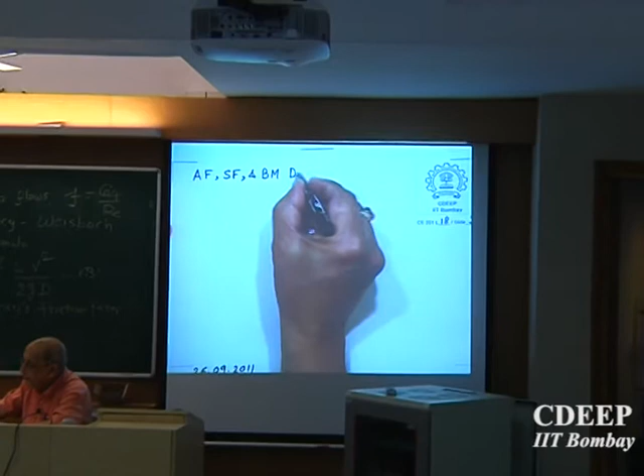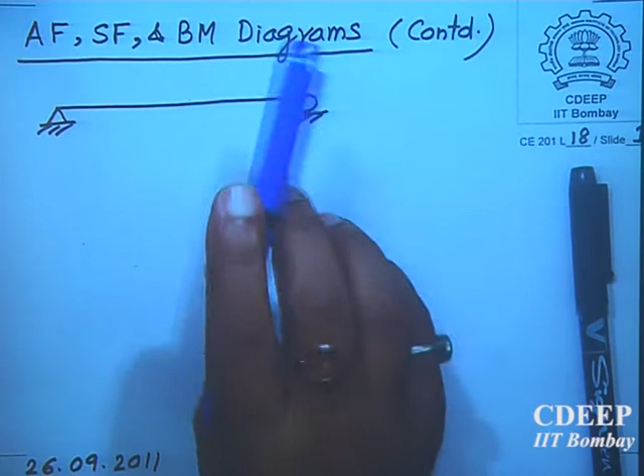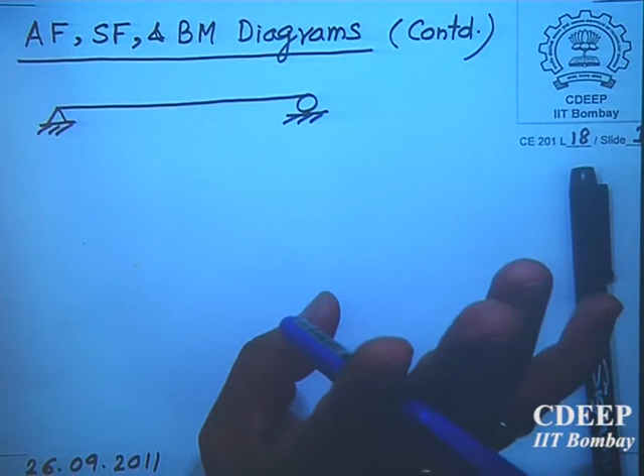We will continue with this. This is a simply supported beam, meaning the support is such that there will be only three reactions. Why is it called simply supported? Because the support is such that there will be only three reactions if the loads are applied to it in any manner. There will be three reactions, and these three reactions can be solved by equations of statics, equations of equilibrium. So such problems are called statically determinate. We are talking of only bending moment diagrams, shear force diagrams, and axial force diagrams for determinate structures, not indeterminate.

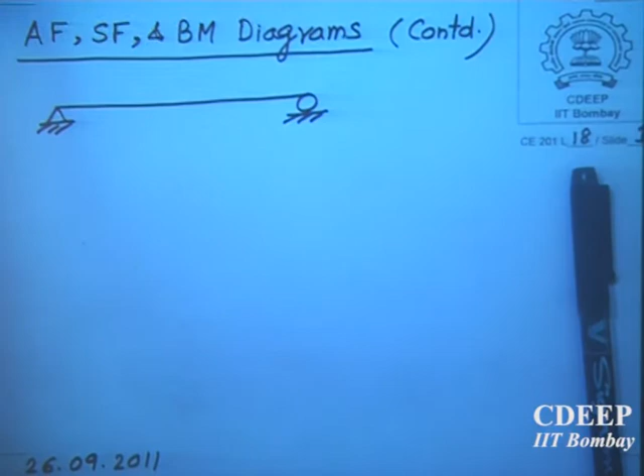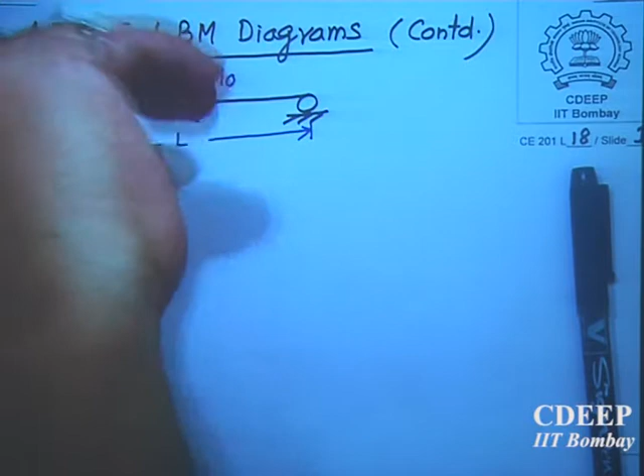So let us say that we have in the center at L by 2, this is L, length is L, at the center I apply a bending moment M naught. Now how do you apply this bending moment M naught? A moment whose vector is perpendicular to the plane of the paper. So there are various ways in which this bending moment can be applied.

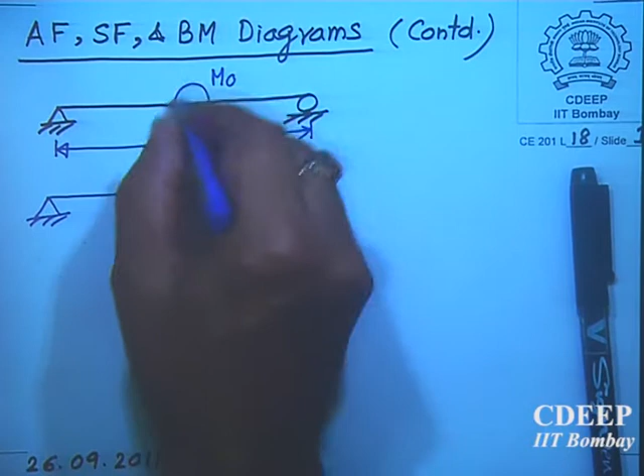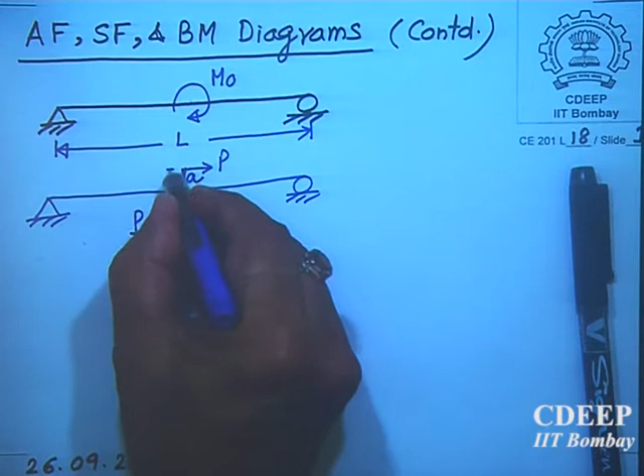Diagrammatically this is all right, that you have applied a bending moment. Now a moment also is called a free moment. It can be applied anywhere, although I am saying that it is applied in the center. So here I can apply this, I can have a small length, this can be A, this can be again A, this means this length from here to here. So I apply a couple, equal and opposite forces, and the distance between them is 2A, such that P into 2A is equal to M naught.

So this is a possibility. Now can you apply this? How do you apply a force like this? A horizontal force. Okay, P into 2A, I will keep that. I think you should learn how you will apply this force. So there are various ways.

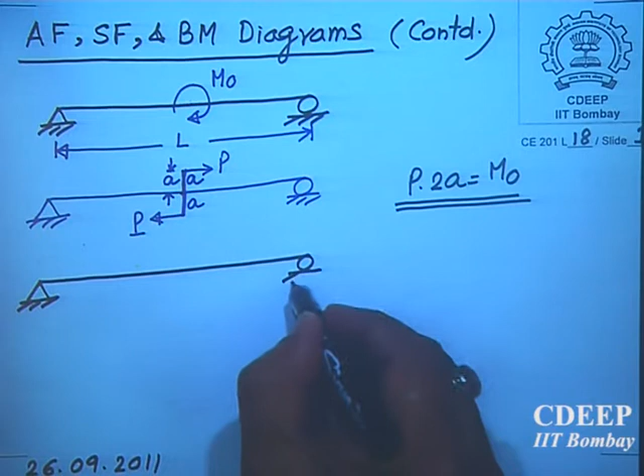I think this is where I am poor in experimentation, but then you should be able to, innovation comes only through experimentation. So you should be also a good experimentalist. In addition to being a good theoretician, you should also be a good experimentalist.

You should know how to apply this load. It is not that you have to apply it directly. So here you can have a stud which is welded over here. You can weld a small piece of a small rod to this beam. Similarly, you can weld here also. Welding, you can do the welding. So this length is A. You can put a...

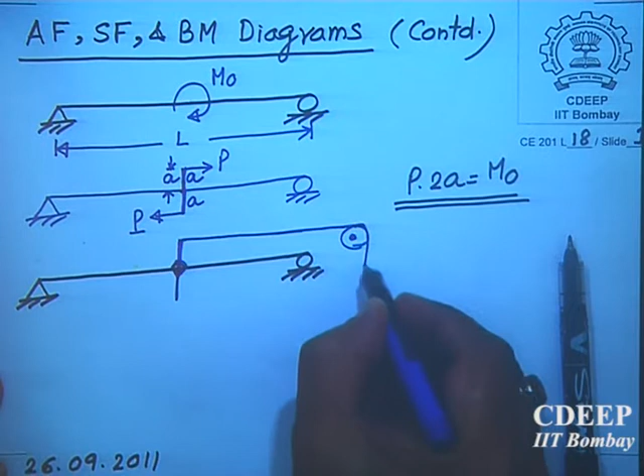String, and you can have a pulley here, a frictionless pulley, and apply P to a load here. So that will pull. This string will be under tension. So this P will be everywhere if there is no friction. And similarly here also you can do the same thing. You can put a pulley, force. Pulley means there has to be some support, and then weight. So this will also be under tension.

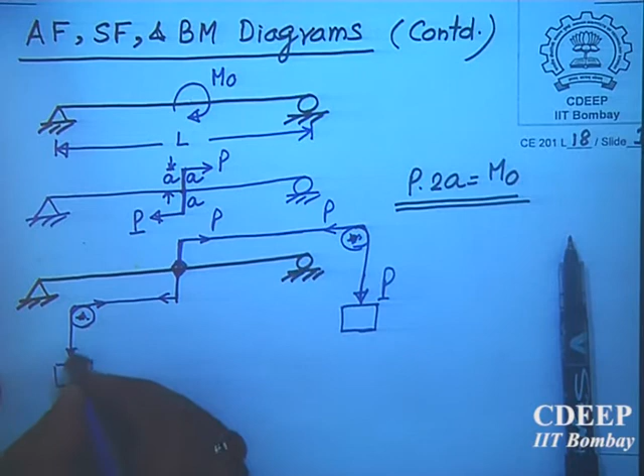So these are the ways in which this moment can be applied. This is not torque, this is bending moment. Sorry, it's not torque—torque has to be applied along the axis of the member. There is a difference between bending moment and torque, so teachers also make mistakes. It is not torque, it is bending moment. Torque you have seen applied to a shaft under twist, a circular shaft under torque—that is applied along the axis, the vector is along the axis. Here it is not along the axis, here it is perpendicular to the axis. This bending moment, okay.

So this is a possibility. So the moment is applied. Now I want you to draw axial force, bending moment, shear force diagram for this. I have not drawn it yet. So first of all, you have to draw the free body diagram. So this is a rod. Draw it very neatly.

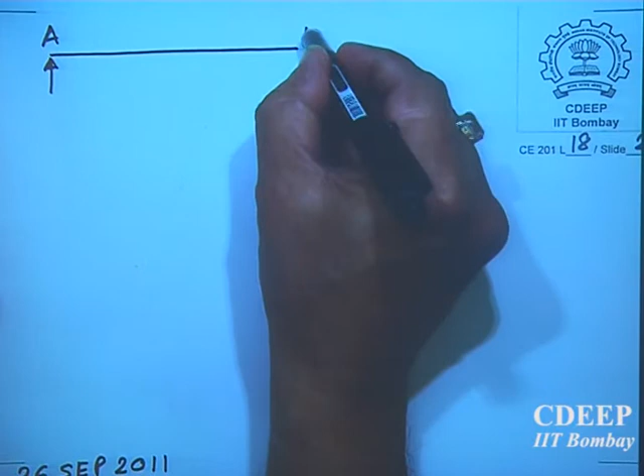This point is A, this point is B. This is a roller, so there has to be only a reaction upwards. This is a hinge, so there will be two reactions, let us say VA and HA, and here it is VB, and here we are applying moment M naught.

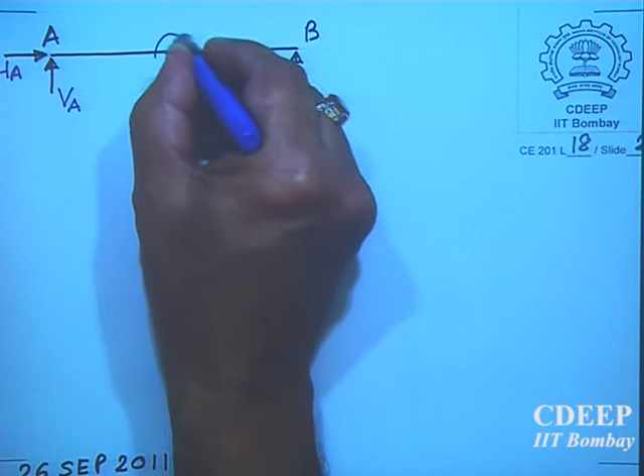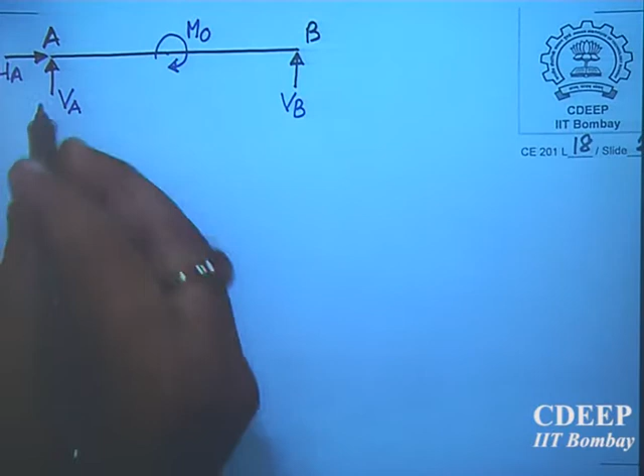Because this is a free body diagram, what about the free body diagram of the support, which is not normally given? Support is here, you have removed the support, so support will be, and similarly here is the support. You have removed, you have cut through the support, so this will be subjected to VB.

Here this will be subjected to VA and HA, equal and opposite. Newton's third law comes in here, equal and opposite. So this is the free body diagram of the support, the hinge and the roller, and this total is the free body diagram of the beam.

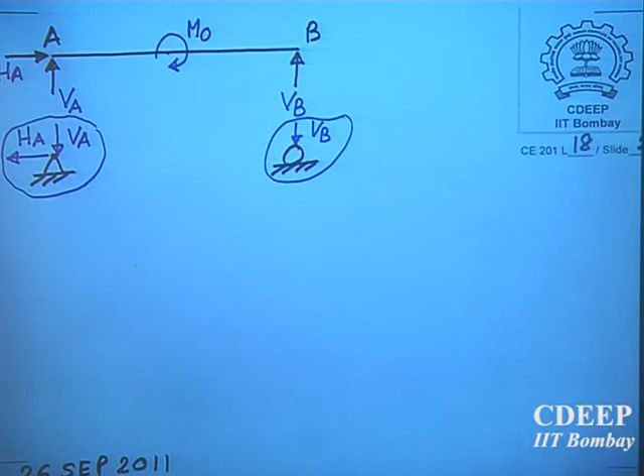Is it okay? Have you understood? So although we never draw this, I don't know whether this is given in the book. Support free body diagram, is it given in the book? Check up.

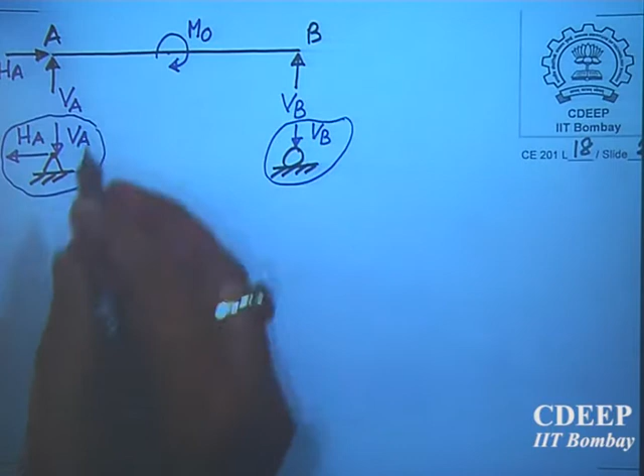So first thing is VA plus HA, horizontal force must be 0, so there is only HA. Then VA plus VB is 0, there is no vertical force, so this is equal to 0. Take moment about any point, I am taking moment about point A. So about this, M naught is a free vector, so M naught clockwise minus VB into L equal to 0.

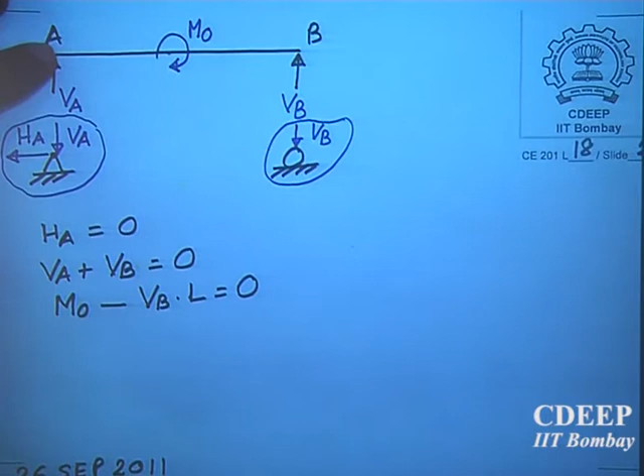These are the three equations of equilibrium. So this you have to write clearly, then only you can find out. Now HA, first one is giving, so from here you get M naught by L. VB equal to M naught by L. So directly you got the value of VB here. Is it okay? M naught by L.

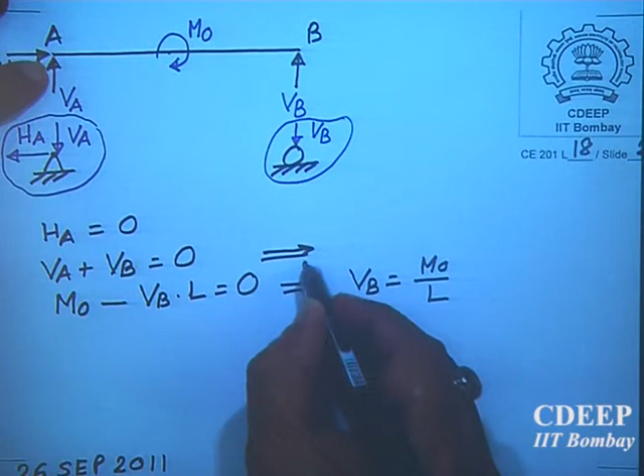And go back, go to here, from here to here, and then you can get VA equal to minus VB, that will be equal to M naught by L with a negative sign. So all the three reactions are known now in terms of M naught and the geometry of the beam. What is the geometry of the beam? Length, and of course cross section is not coming here.

Modulus of elasticity, moment of inertia is not coming here. Area of cross section is not involved. When will these quantities come into the picture? Area of cross section, moment of inertia, when will that come? You have solved some problems in axially loaded members. When did the area of cross section become required? When did you require the area of cross section for computation?

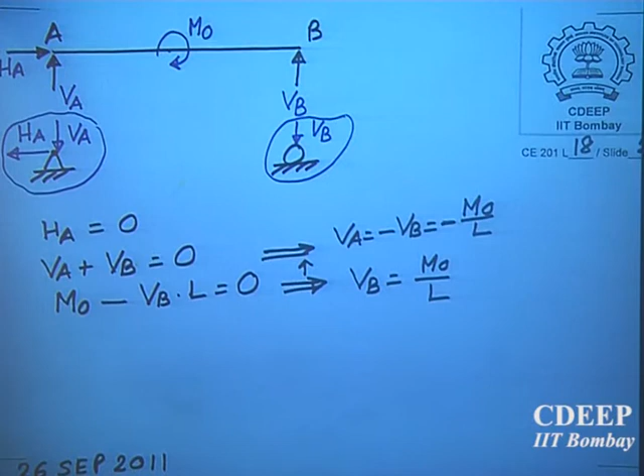Stress and strain. Okay, but before that, how will you find out the forces in the member? When the problem is statically indeterminate, then you have to consider geometrical deformation. We have not considered that, because this beam will, under the moment, this will deflect, this will deform. We have not considered deformation of the beam, we have not considered deflection of the beam. So we have considered here only equilibrium.

How many laws are there for mechanics of solids? Three: equilibrium, then second one is study the deformation, and then the stress-strain law or force-displacement law, the relationship between stress and strain or between force and displacement. These three are required. So when do you go to the other two steps?

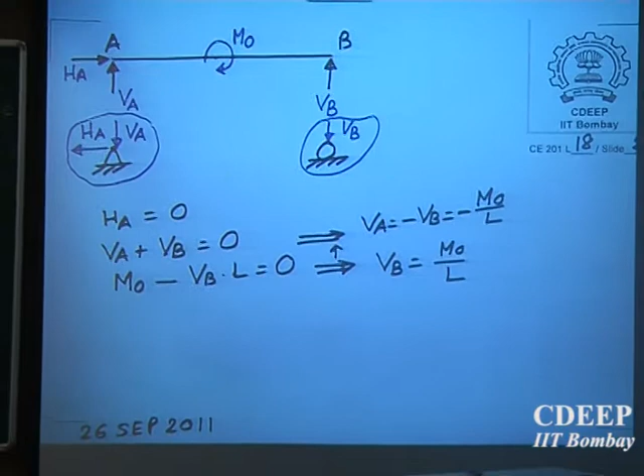When the problem is statically indeterminate. When the problem becomes indeterminate, then you will be required to use geometrical properties, the cross-sectional modulus of elasticity, things like that. Here we have not, equilibrium doesn't require anything. Equilibrium, it is very simple. So if it is statically determinate, you don't have to worry about other properties.

Okay, so anyway you have got this, now you have got all the. So now my problem is that. So now you have a beam, and then you have VB is equal to VB is same, so VB direction is correct. So this is M naught by L.

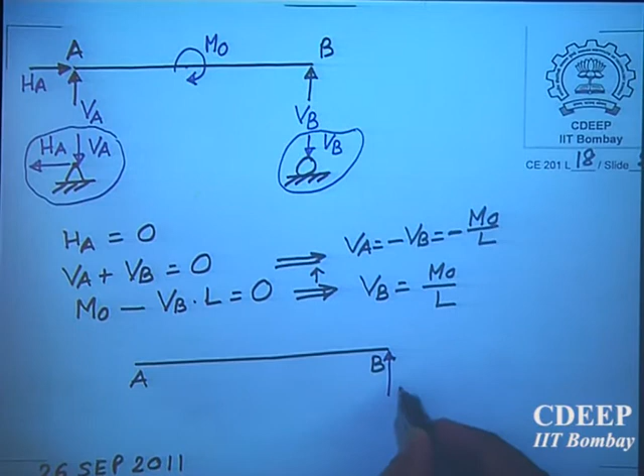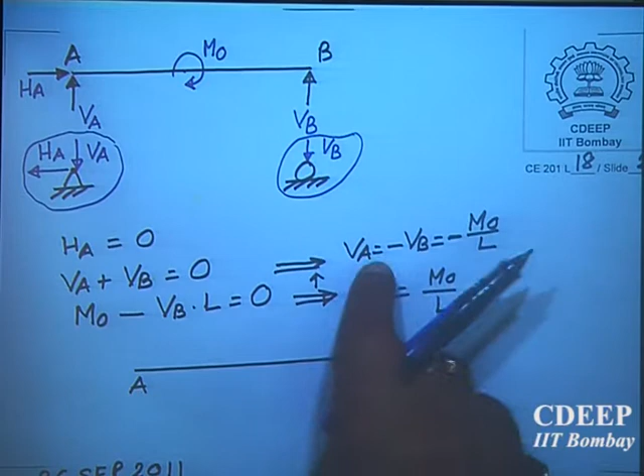At VA, the direction is VA equal to minus M naught by L. So whatever you assume, it must be reversed. So VA is like this, downwards. At A, the force will be downwards. You can draw from top or you can flip it, because I have written here A, so I didn't have space, so I have drawn it up.

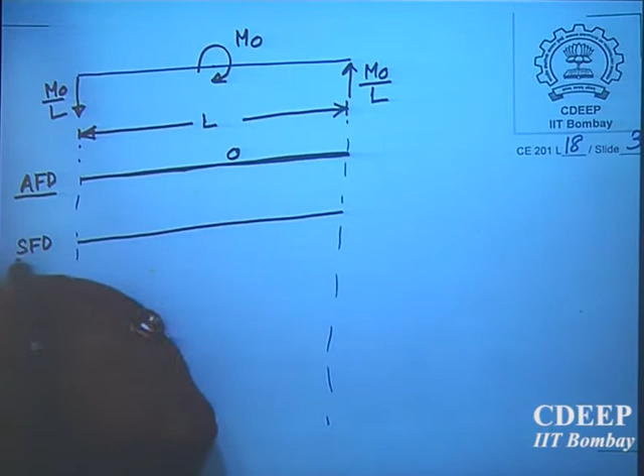So this is at a distance x.

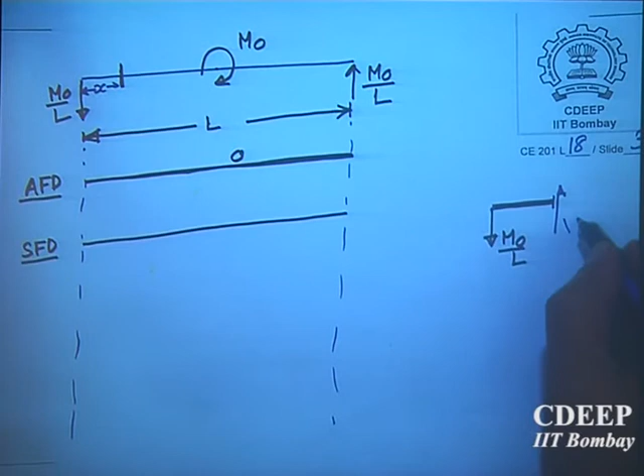So what is the positive shear force? Positive shear force is when our shear force is like this. I have taken, on a positive x face, shear force upward is positive. So this is my diagram.

So what will this be equal to? So V will be equal to m naught by L, positive. As per this convention, upward and this is downward. There is no other force. So in order to keep this small piece of rod in equilibrium, vertical equilibrium, you need V must be equal to m naught by L.

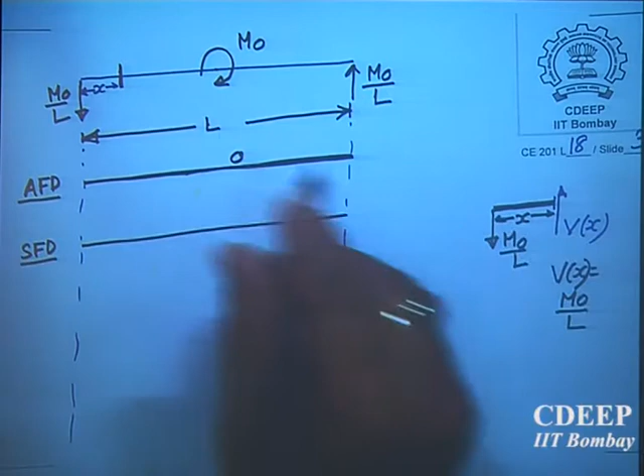And then this is independent of x. Although I have written here x as a function at a distance x, even if you put this anywhere, vertical force will remain the same. Even before this m naught or after this m naught, it will not change. This is very important here. There is no change of shear force from positive to negative here.

So here I will draw a shear force diagram which is positive, m naught by L. Now how many people understood this? It will be positive shear force throughout the length of the rod, throughout the length of the beam.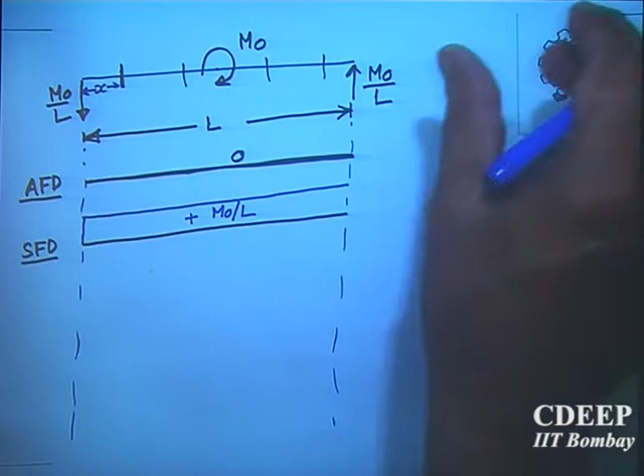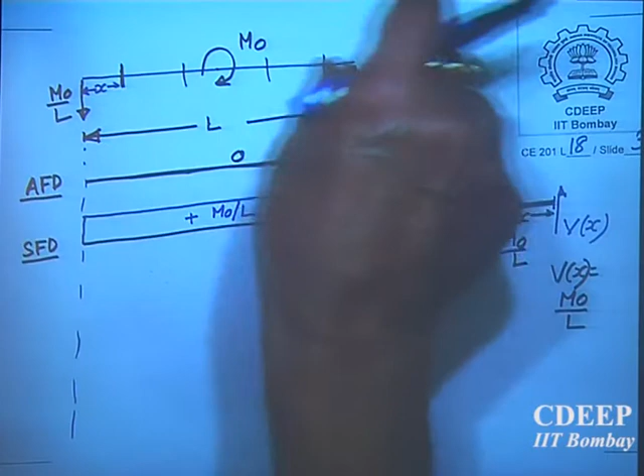There is no change. See, because even if I take the section over here at m naught, vertical equilibrium, m naught will not come into the picture. We are not taking moment equilibrium, we are taking only vertical equilibrium in order to find this out. So there is no vertical force anywhere, and this is the only force. So throughout the length, it is m naught by L. The shear force diagram shows a constant shear of m naught by L. The whole rod will be subjected to this constant shear.

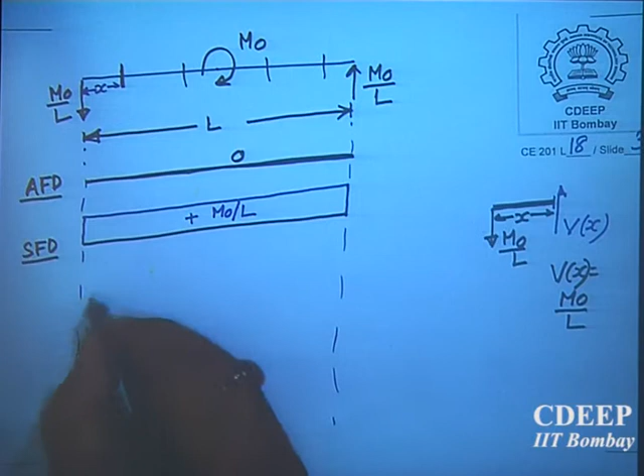Now please go to the bending moment diagram, BMD. Yes, BMD will be what? Now at this same section, what is my positive bending moment? My bending moment diagram on a positive x base is like this, whatever I have drawn.

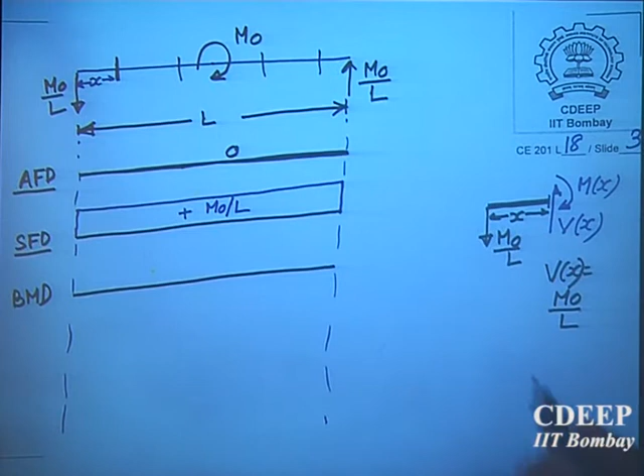So you take moment about this point. Moment of V will be 0, and therefore this m will be equal to m naught by L into x. So therefore you get Mx equal to m naught by L into x. How many people understand this?

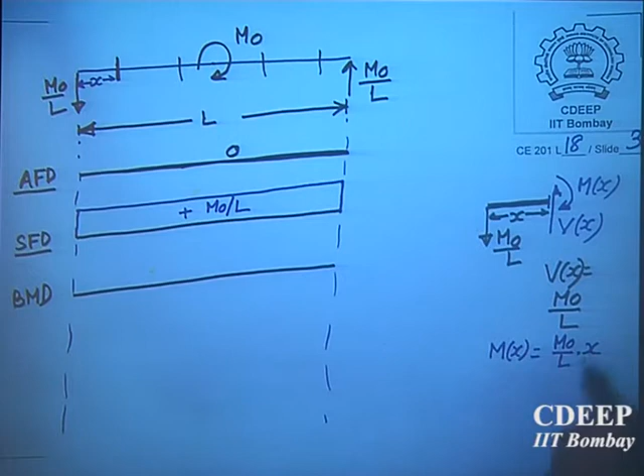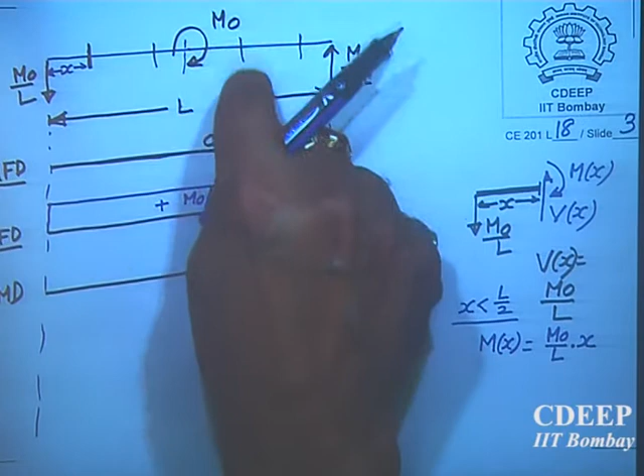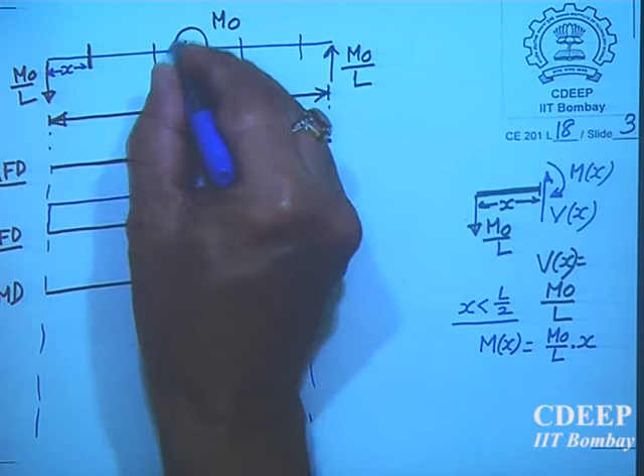So anyway, but the thing is, now here there is a problem. I will have to write that this expression is okay till x is less than L by 2, because m naught will come later on. So this expression is alright provided x is less than L by 2. Because once I take x beyond this point, I must consider m naught also. See, till this point, since m naught is not there, it doesn't matter. M naught is acting at the center, so it will matter here.

Now afterwards, when x is more than L by 2, let us take the free body diagram from the left side. Let us say this is the center, so there is a bending moment here, m naught, and this is my x. This x is more than L by 2. At this cross section, my bending moment here is m.

I want to find out this Mx. Is it okay, free body diagram? This is the total length, this is the length which is going beyond m naught. M naught is acting here, and then I have taken x beyond the center point, and so I want to find out this value. So I take moment about this point, so I get Mx will be equal to m naught by L into x, which is opposite, and then minus m naught.

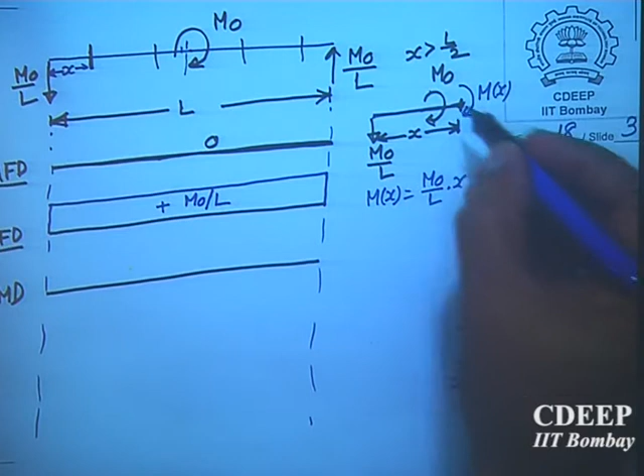Minus m naught, because m naught is coming here. So at this point, take moment about this point. So this is m naught divided by L into x minus m naught, because this is acting clockwise. Clockwise is positive, otherwise you have to write on the left hand side. So this is equal to clockwise, anti-clockwise, and that becomes equal to x minus 1.

M naught can be taken common, so we get m naught times x by L minus 1.

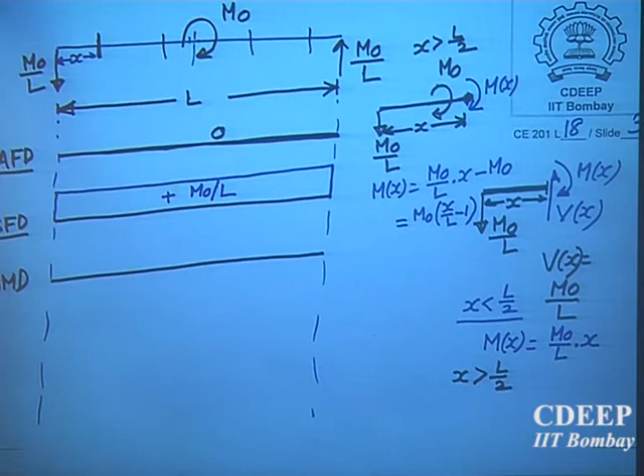X has to be taken more than L by 2 here. At x equal to L, this is equal to 0. At x equal to L by 2, how much? Minus m naught by, at x equal to L by 2, this will be 1 by 2 minus 1, so minus m naught by 2. Similarly from the first expression, which was here, we are going upward. Now for the first expression, at x equal to L by 2, this is m naught by 2 again, but positive.

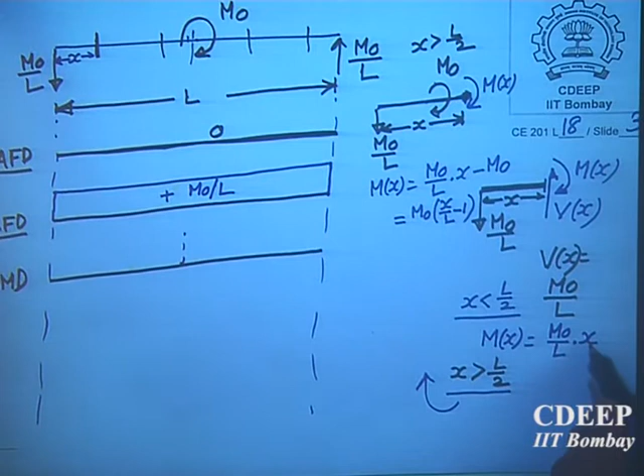So my bending moment diagram will be going like this. From this it is positive, so at x equal to 0, it is 0. It is a triangular linear variation, going up, and this value is m naught by 2, positive. Then we find that it changes, comes down and then again it goes, so this is again m naught by 2. What is this total value? M naught by 2 and m naught by 2 equal to m naught. So total moment is m naught at the center, half up, half down. So there is a change.

If you see, it is going up, and when this m naught comes, there is a jump. Just like we had drawn last time the bending moment and shear force diagram, when there was a central vertical load, there the shear force changed suddenly. This value also, this line cannot be vertical, actually it is slightly inclined, because the expressions are valid not exactly at x equal to L by 2, they are valid less than L by 2 or more than L by 2, slightly. So actually this line has to be inclined slightly.

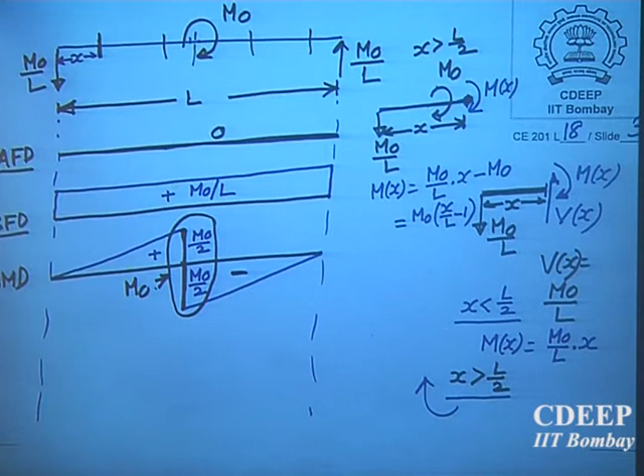You cannot find out exactly at L by 2, that is a point of singularity. There is a change, you have applied a concentrated moment, and there is a change total from plus m by 2 to minus m by 2. So this is negative and this is the bending moment diagram. So remember, wherever you will have a concentrated moment in any bending moment diagram, whenever you draw it, there must be a change from positive to negative or from negative to positive.

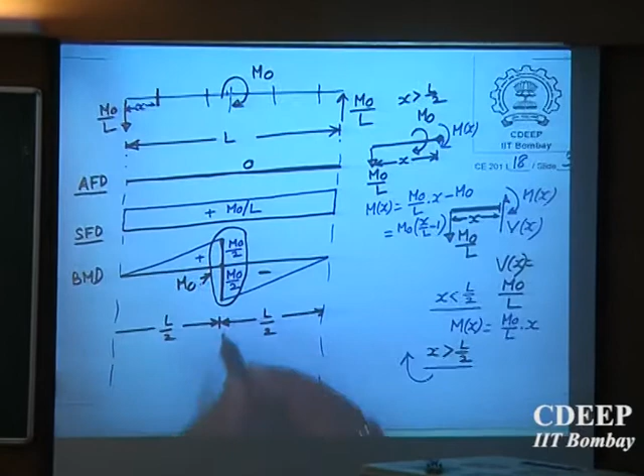I am coming to that now. So one is, I have done this with L by 2, this in the center. So all the three diagrams are drawn.

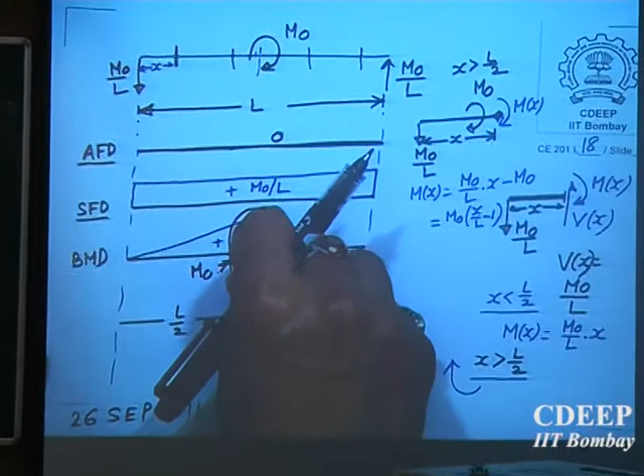So this is very important, remember: if there is a concentrated force on the beam, wherever it comes, there must be a sudden change in the shear force diagram. Whenever there is a concentrated moment, there must be a sudden change in the bending moment diagram. And the change value must be equal to the total moment, total shear force, or total load applied at that particular point. Is it okay? Total moment, see, from plus to minus m naught it is coming. Similarly, in the case of load, it was coming from minus p by 2 to plus p by 2 or vice versa. But these diagrams are drawn based upon convention.

Now, what kind of moment and shear force have I taken? This kind of moment produces tension at the top of the beam, so it will bend. I think I have shown this earlier.

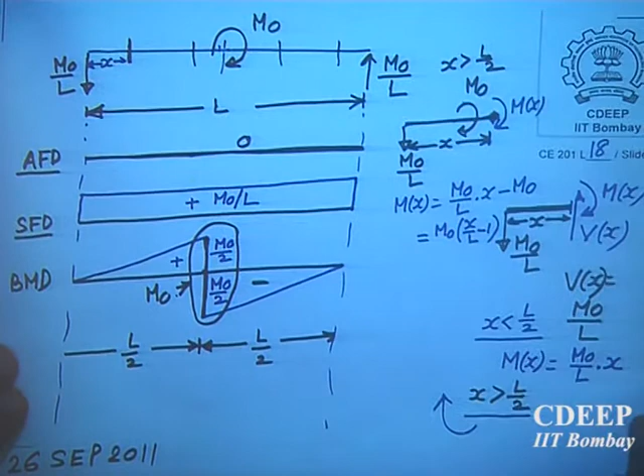So when there is a small beam element of length delta x, I have cut this at two sections: x and x plus delta x. So I have separated it. My bending moment diagram is like this, here m and here also m.

Again, whenever on this small beam which has a small depth, the shear force diagram, positive shear on the positive face will be like this shear, and on a negative face the shear will be like this. So this is my shear force diagram. How will you get this kind of shear, upward? On the left face you are getting upward shear. This is very clear to understand that this will produce tension at the top and compression at the bottom, because this will be bent like this.

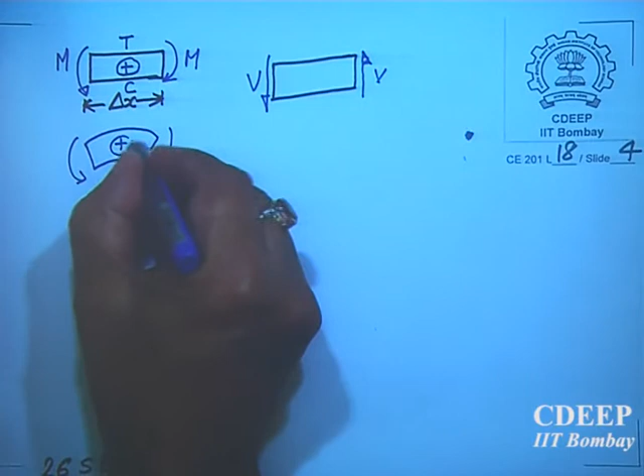Under positive moment, here it is tension, here it is compression. You must have seen that for positive bending moment, we draw tension on one side and compression on the other. On the tension side, positive bending moment; on the compression side, negative bending moment. There is physics involved in this, I am not drawing it just like that.

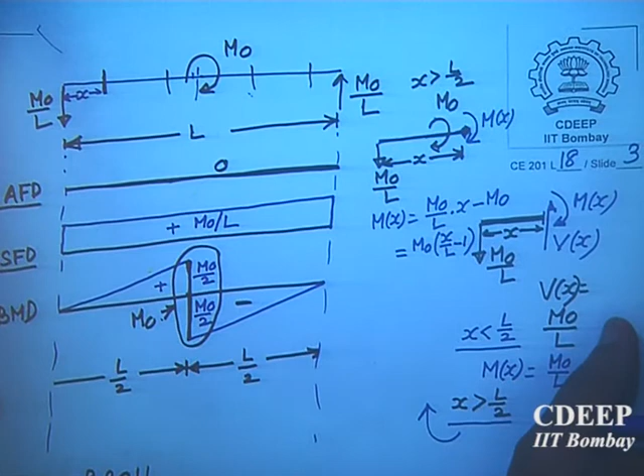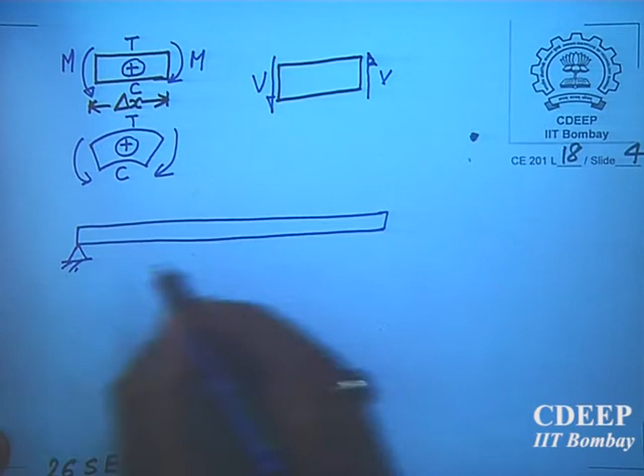So you should also try to visualize what happens to the beam as such, because the beam has some depth. What happens to the beam? The beam is simply supported and you have applied a bending moment here, moment m naught. So how will it deflect? What will be the shape of the beam under the action of this? This also you must visualize.

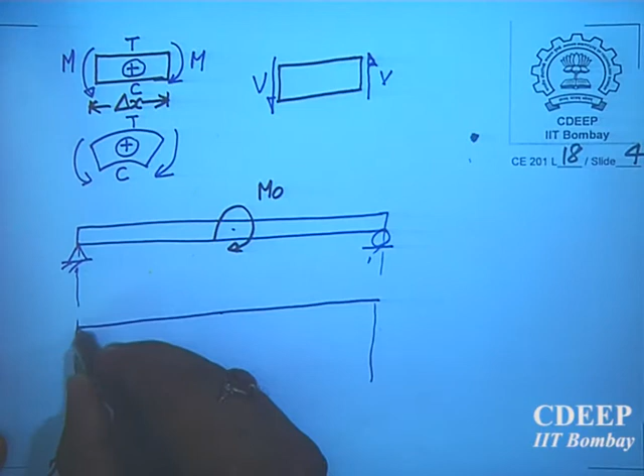If this is the axis of the beam, this is trying to rotate the beam like this. So over here it will go something like this, because here it has to be 0, here it has to be 0. How will you get tension at the top? So this is the deflected profile.

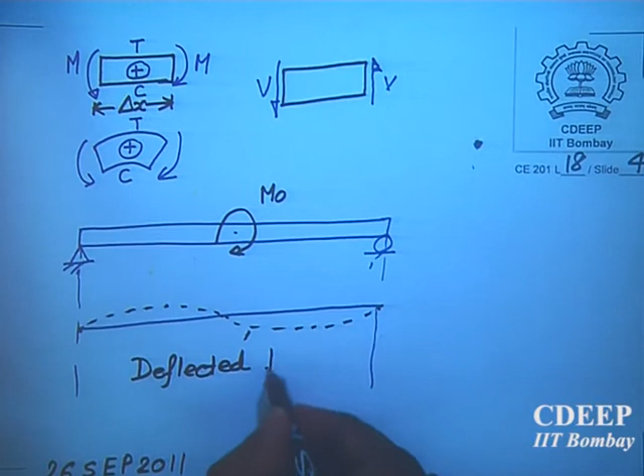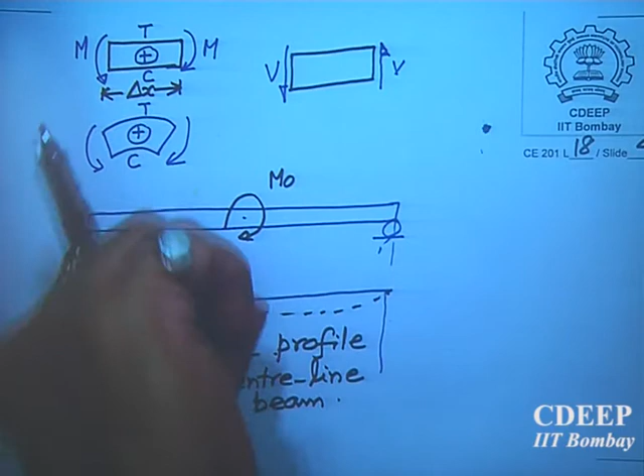Profile of the center line of the beam. Center line means center axis, the axis of the beam. It will deflect something like this. The beam will deflect because you are applying a bending moment here, bending its center. So at this point it is not going to deflect. Here it will be 0, here 0, here it will go up and go like this. You should always think of this, because then you will not draw the wrong bending moment diagram.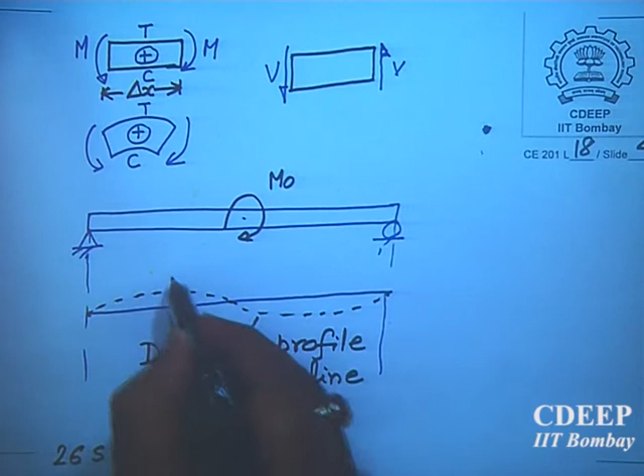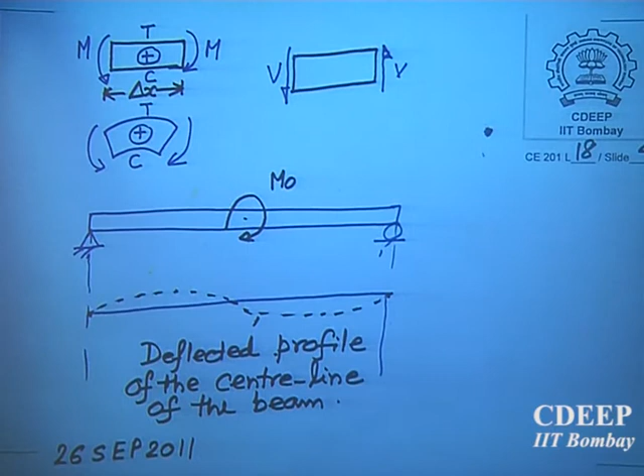So you can see, yes, the bending moment must be positive here. This is tension at the top, this is tension at the bottom. What is this point? Center point. See, suddenly the bending moment is 0 here. Was it not 0? Because it has to come and cross the axis. From positive to negative means it is coming to the 0 axis. Here it is 0 at the center, because I told you this line has to be inclined.

So at this point, what is the bending moment at the center? It has to be 0. It cannot be, first of all, 0 in the sense that means it is passing through the axis. It is not 0 - actually you have applied a bending moment which is m naught. But then it is passing through the center from plus to minus. So it is passing through.

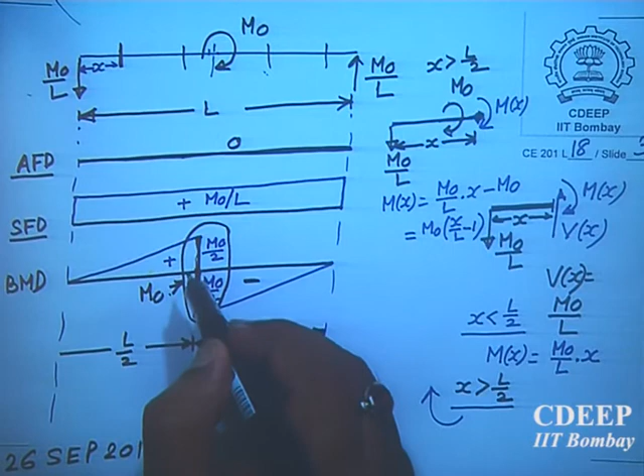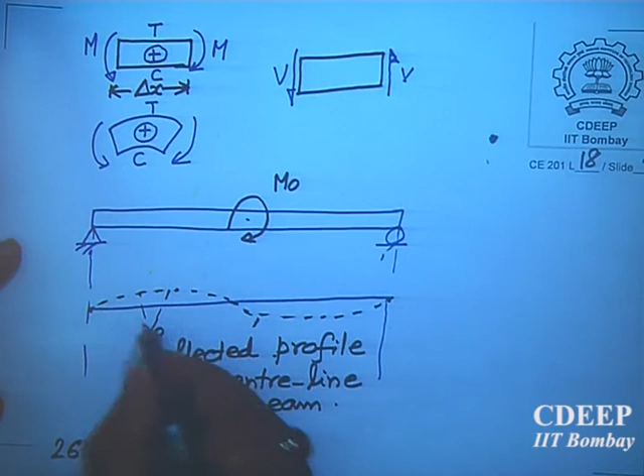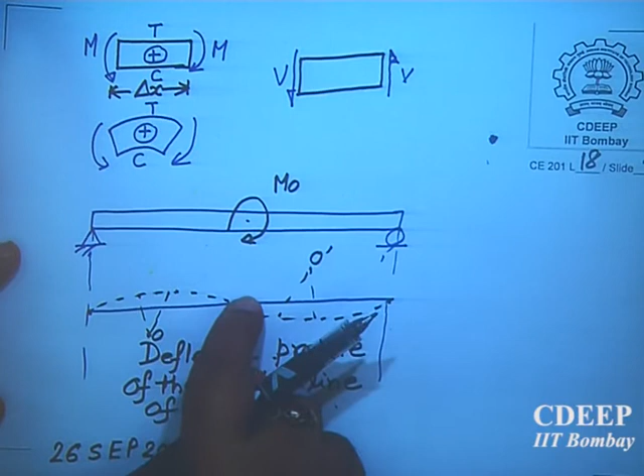There you have the curvature of the center line of the beam, the axis of the beam - the curvature. If I take 2 points here, the center of curvature is here. And here if I take 2 points, the center of curvature is here. Do you agree? For this curve, what will be the center of curvature? This will form some curve, not necessarily a circle, but it is going to form a curve. So if you take 2 points and draw, they will meet somewhere. That is called the instantaneous center of curvature.

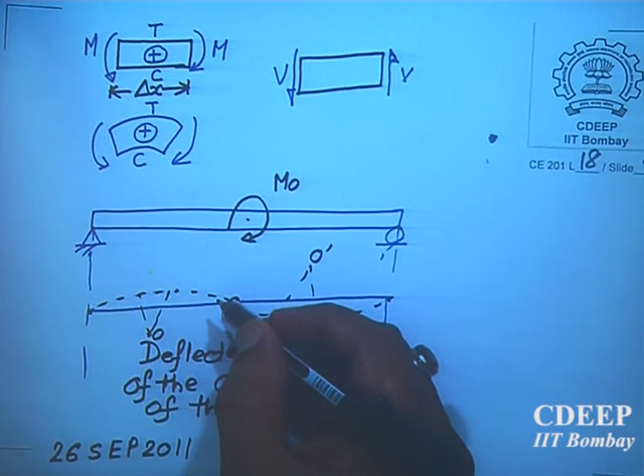And on this side, at this point the center of curvature - so it is going from positive to negative. This point is called where the bending moment changes its sign. The point where the bending moment changes its sign from positive to negative or from negative to positive. Is it okay? This is the point.

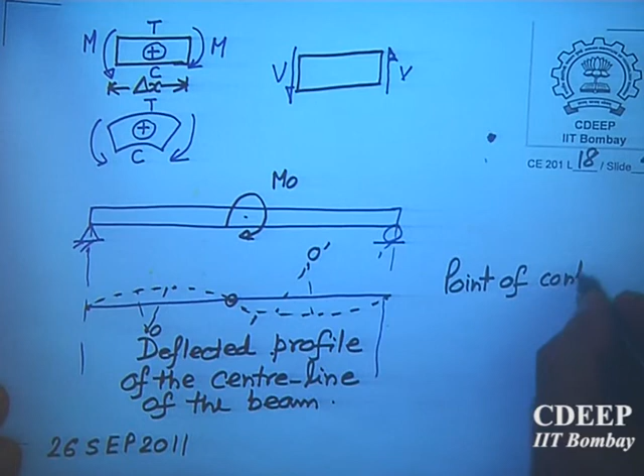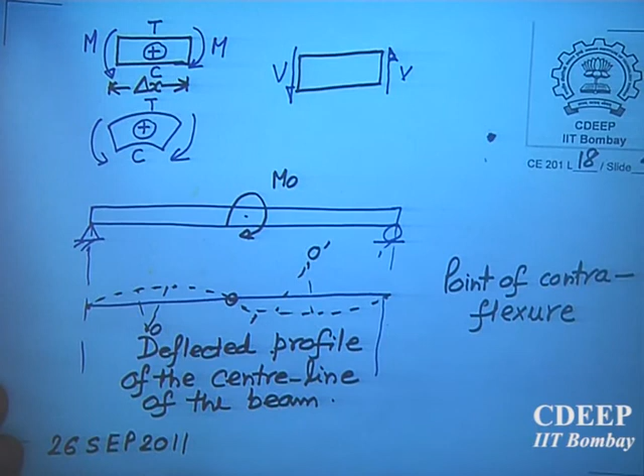It is called point of contraflexure, because this is flexure - bending in this way, bending in this way. The point of contra-flexure. Point of contra bending - flexure and bending are used synonymously, the words flexure and bending have the same meaning. So it is called point of contraflexure. Contraflexure is one word, a hyphenated word.

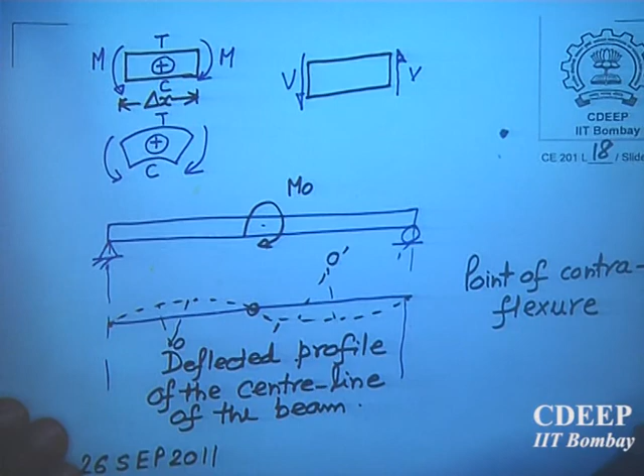So contraflexure - why is it called the point of contraflexure? Because the curvature is changing here. This is the point where the curvature of the curve is changing. Curvature of which curve? The deflected profile - the beam which is deflecting is changing. So remember, whenever you draw any bending moment diagram or shear force diagram, note down also the points of contraflexure. There will be situations where this will come.